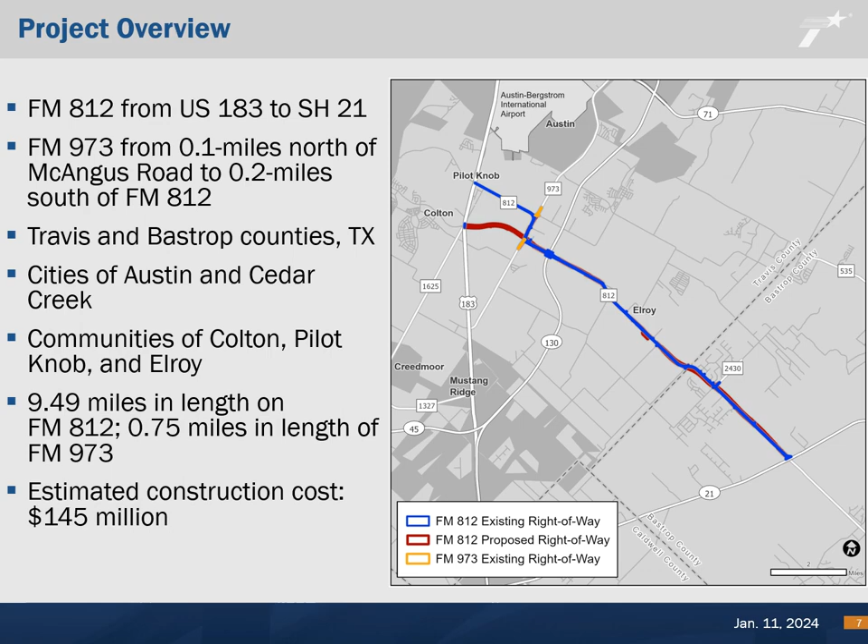Between US 183 and FM 973, the existing roadway consists of 4 travel lanes, 2 12-foot wide lanes in each direction, with a 2-way center turn lane.

From FM 973 to Elroy Road, the existing FM 812 is a 2-lane undivided rural roadway with a 12-foot wide travel lane in each direction, a 4-foot wide shoulder in each direction, and a 12-foot wide center turn lane. The existing FM 973 is a 2-lane undivided rural roadway with a 12-foot wide travel lane in each direction, a 4-foot wide shoulder in each direction, and a 12-foot wide center turn lane.

There are minimal sidewalks or bicycle lanes present along the FM 812 or FM 973. Existing drainage is carried in open ditches, and existing right-of-way is approximately 100 feet wide along both roads.

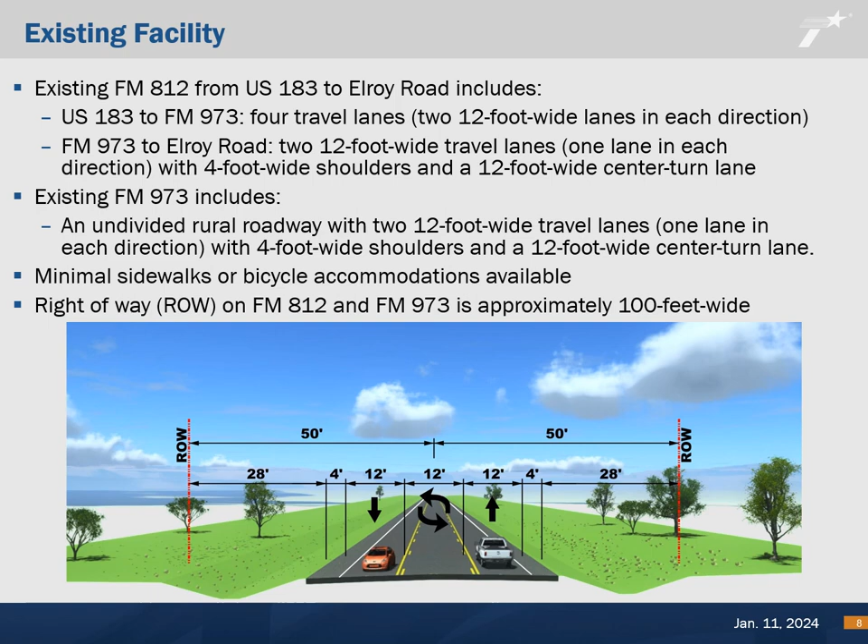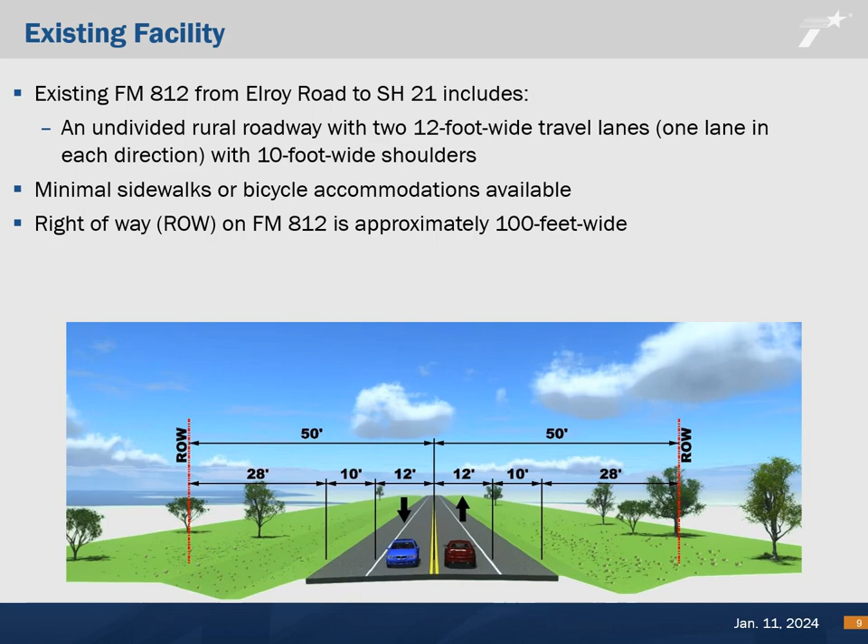The existing FM 812 from Elroy Road to State Highway 21 is a 2-lane undivided rural roadway with a 12-foot wide travel lane in each direction and 10-foot wide shoulders. There are minimal sidewalks or bicycle lanes present along FM 812. Existing drainage is carried in open ditches, and existing right-of-way is approximately 100 feet wide.

The proposed project would have varying layouts shown in the next few slides. The first section of FM 812 from US 183 to Piland Triangle would consist of a 5-lane roadway, 2 12-foot wide lanes in each direction, and a 16-foot wide 2-way center turn lane. The project also includes a 10-foot wide shared use path for both bicyclists and pedestrians. The 1.46-mile portion of the roadway from US 183 to FM 973 would be realigned on new location as seen in the map on the upper right corner of this slide.

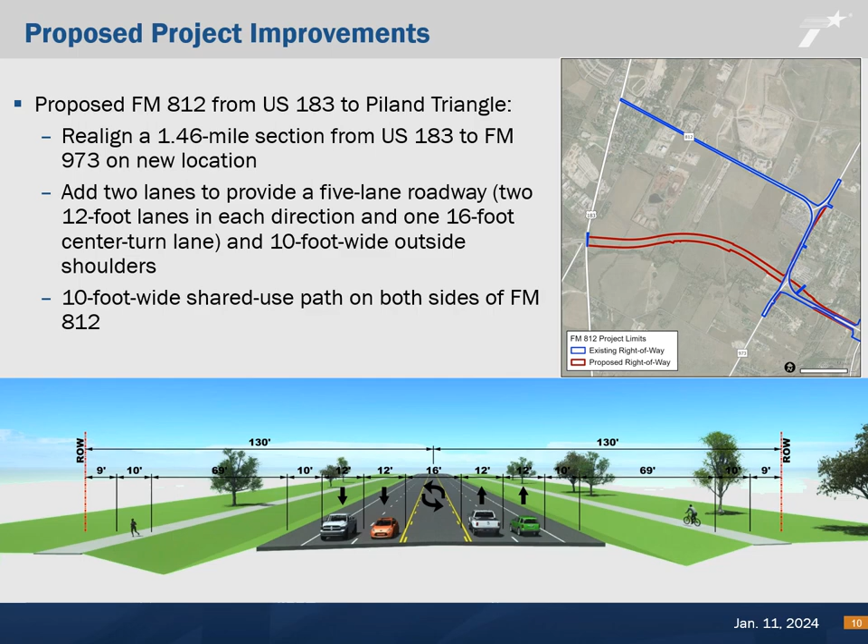The next section of FM 812 from Piland Triangle to Peterson Road would consist of a 5-lane roadway, 2 12-foot wide lanes in each direction, and a 14-foot wide 2-way center turn lane with curb and gutter. The project also includes a 10-foot wide shared use path for both bicyclists and pedestrians.

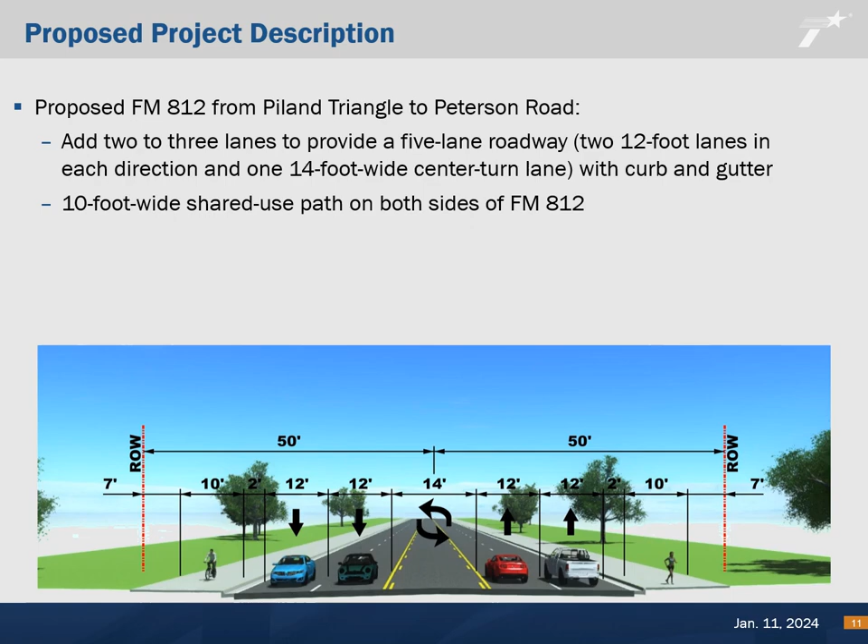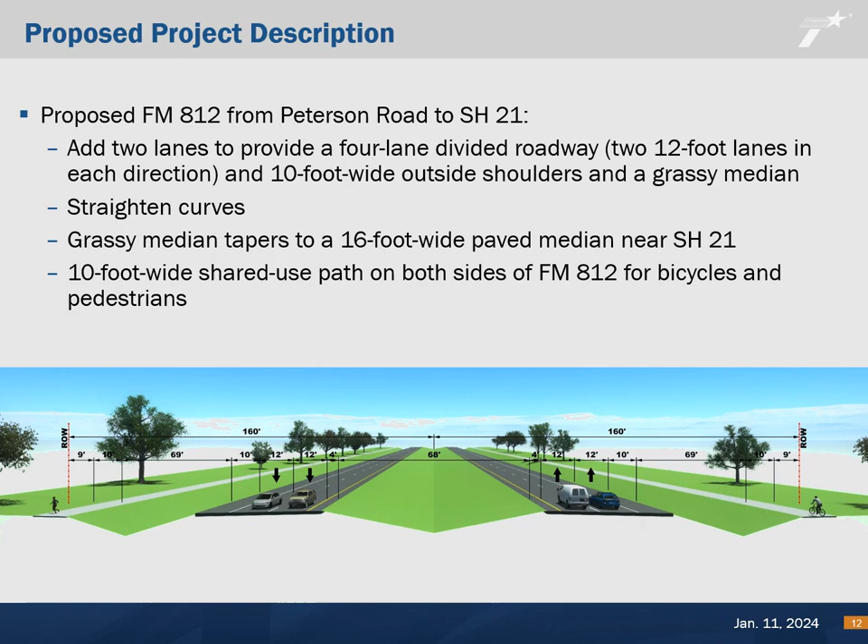The section of FM 812 from Peterson Road to State Highway 21 would consist of a 4-lane divided roadway with a grassy median that would contain 2 12-foot wide lanes in each direction. Some curves would be removed to straighten the roadway. The grassy median would taper to a paved median near the intersection of State Highway 21. Again, this segment would provide shared use paths for bicyclists and pedestrians.

FM 973 would also have some improvements for a 3/4 of a mile stretch of roadway from just north of McAngus Road to just south of FM 812. The 2 intersections of FM 973 and FM 812 contain 90-degree curves that would be eliminated with the proposed project. The improvements would consist of providing 2 12-foot wide travel lanes in each direction with a 14-foot wide center turn lane. A 10-foot wide shared use path would also be provided on both sides of FM 973.

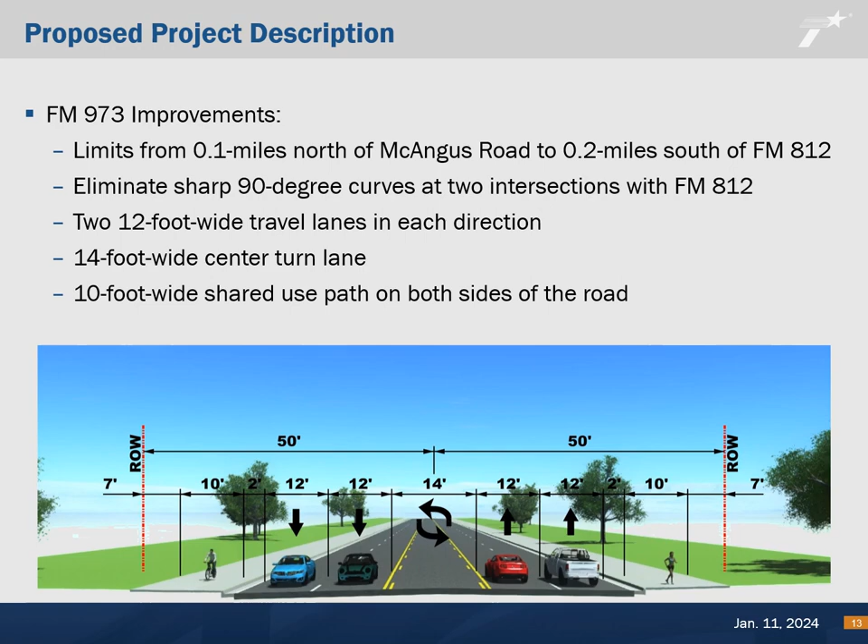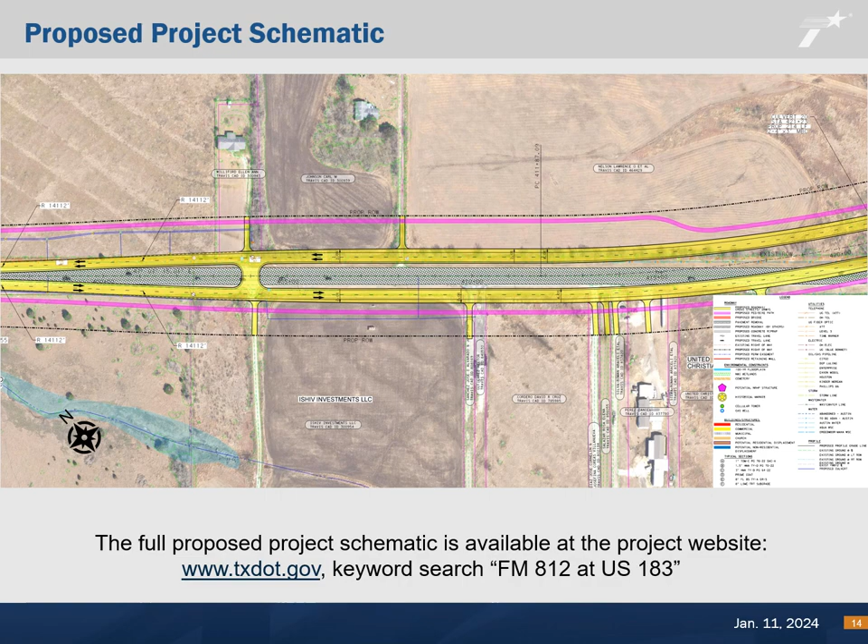Shown on your screen is a preview of the project schematics. The full proposed project schematic is available at the project website for public review at the TxDOT website, www.txdot.gov, keyword search FM 812 at US 183.

The FM 812 corridor between US 183 and State Highway 21 is experiencing significant growth. The roadway does not meet current design standards, resulting in mobility and safety issues. As the area continues to grow and develop, these issues will only continue to worsen. Upgrades are needed to FM 812 to improve safety and mobility and to reduce congestion. The purpose of the proposed project is to upgrade FM 812 to current design standards to improve safety, reduce congestion, and to improve mobility throughout the corridor.

For this virtual public hearing with in-person option, notices were mailed and/or emailed to elected officials on December 15, 2023. Notices were also mailed to community facilities such as schools, daycares, churches, and emergency services. Notices were mailed to adjacent property owners as identified from Travis and Bastrop County appraisal districts on December 18, 2023. The notice was also posted to the TxDOT website on December 15, 2023.

The hearing update was also displayed on roadside changeable message signs beginning January 2, 2024. Advertisements were published in English and Spanish, as applicable, in the following newspapers: the Bastrop County Advertiser, Austin American Statesman, and El Mundo, in December 2023.

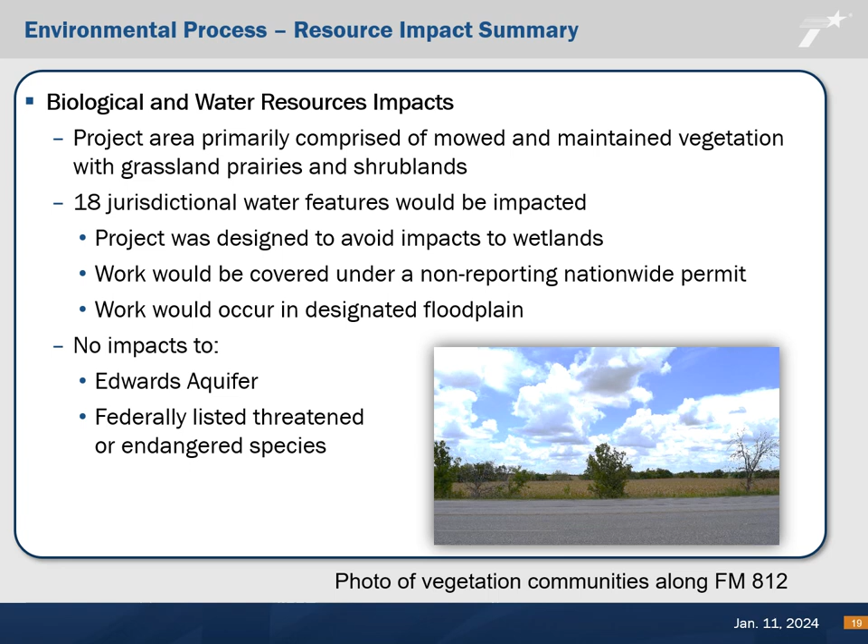TxDOT conducted a community impacts analysis for the proposed project. Even with the proposed widening of FM 812, access would be improved by the construction of the new location roadway and by the pedestrian and bicycle accommodations. Spanish-speaking populations in the project area are accommodated during public involvement.

3 residential and 8 non-residential structures would be displaced as a result of the proposed improvements, and 6 residential properties would be potentially impacted. Travel times are anticipated to be improved for most users throughout the corridor, though some users would experience increases in travel times due to the median. Access would remain to all adjacent properties and community facilities. Impacts are not expected to be disproportionately high or adverse as a result of the proposed project.

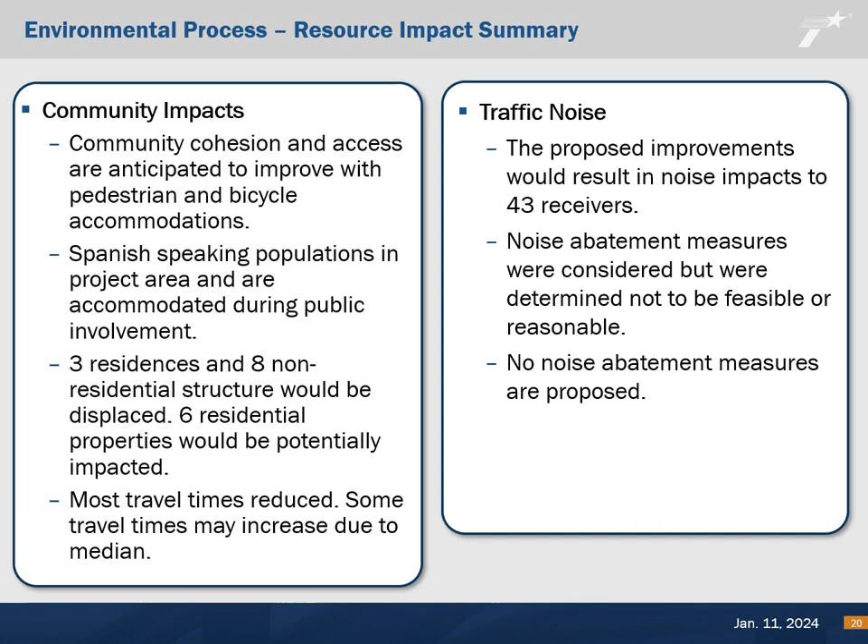TxDOT also conducted a traffic noise analysis as part of the environmental process. The analysis concluded that the proposed improvements would result in traffic noise impacts to 43 receivers, including residential and commercial properties. The noise analysis determined noise abatement measures in the form of noise barriers were not reasonable or feasible and are not proposed for this project.

Additionally, as part of the NEPA process, hazardous materials and air quality concerns were analyzed. During the hazardous materials review, 5 bridges and various potentially displaced structures may contain asbestos. Inspections of these structures will comply with federal and state regulations, and mitigation would be addressed during construction for the bridges or during right-of-way acquisition for the building.

Utility relocations would be required as part of the proposed project. These would be handled by the individual utility companies so that no substantial interruptions in service would occur. No other hazardous materials were identified.

Air quality was also reviewed. No impacts to air quality are anticipated as a result of the proposed project. The U.S. Environmental Protection Agency, or EPA, anticipates that due to vehicle and fuel regulations, mobile source air toxics will reduce over time from the levels they are today.

All technical reports summarized in this presentation can be reviewed online at www.txdot.gov, keyword search FM 812 at US 183.

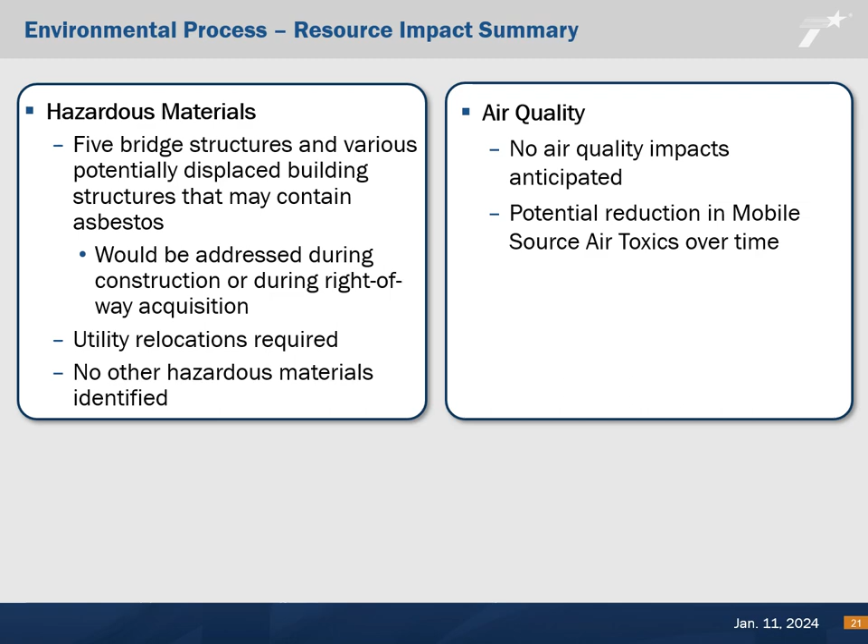The proposed project would require approximately 174 acres of new right-of-way and 2.4 acres of permanent easements. Potential displacements include 3 residences, and 6 residential properties would be potentially impacted. In addition, 8 non-residential structures would be displaced.

Once environmental clearance has been obtained and the project has been fully authorized, TxDOT would begin the right-of-way acquisition process. All right-of-way acquisition would be done in accordance with the Uniform Relocation Assistance and Real Property Acquisition Policies Act of 1970, commonly referred to as the Uniform Act.

Brochures including the purchase of right-of-way, relocation assistance, and the landowner's Bill of Rights are available for you on the public hearing website at www.txdot.gov, keyword search FM 812 from US 183, or on the web address shown on your screen. These documents contain detailed information on the process and requirements for appraisal and negotiations, as well as detailed information to inform you of your rights as a property owner.

In all cases, the property owner would be reimbursed for any reasonable incidental expenses necessarily incurred in transferring the title of the acquired property to the state. If you have questions about the right-of-way acquisition process, please call the TxDOT Austin District Office at 737-272-7027. Note that right-of-way needs are subject to change pending further design refinements.